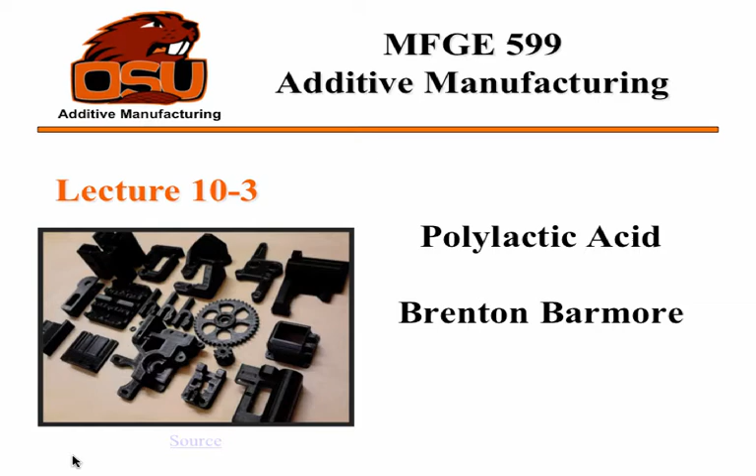My name's Brenton Barmore. I did polylactic acid and accidentally managed to focus only on FDM and then sort of realized there's pretty much nothing else done with polylactic acid, at least that I could find. Well, and that is actually due to its very beneficial properties in FDM.

It has an extremely low thermal expansion coefficient and it has a really, really low melt viscosity, so it's actually the best polymer to be using in an FDM printer. It's so easy to use compared to the others. It's also biocompatible. It's bioabsorbable, just like PMMA, and it's biodegradable, so it's used in a lot of green items. And it's actually food safe, so it's a very useful polymer.

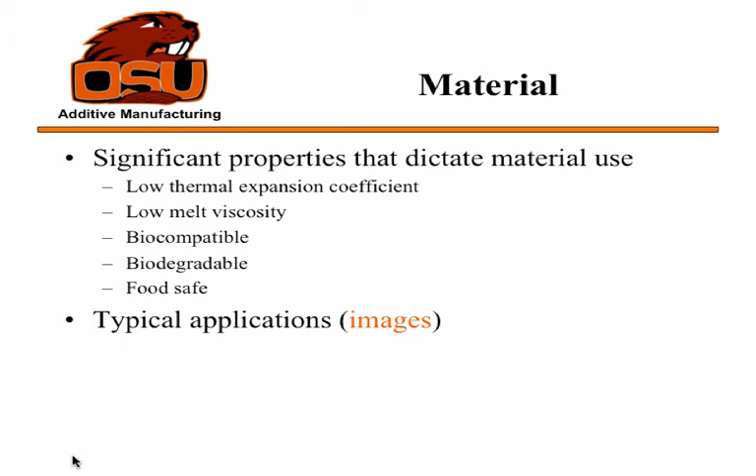Man, this is missing a lot of my stuff, actually. So I had 3 images here. You mind if I just go download the new... Actually, I should have put Michael on there. You can see that.

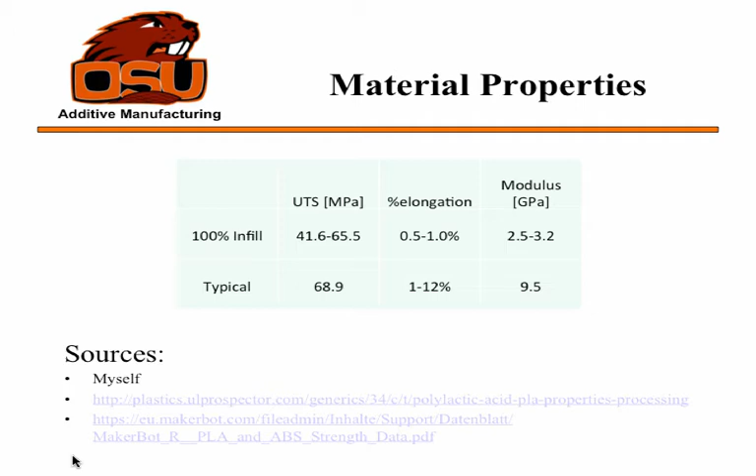And it's because the layers are not actually oriented in the direction of the way you're pulling it, so you just get a shearing effect that breaks everything apart. And shear strength is always much lower; it's usually around half of what tensile strength is.

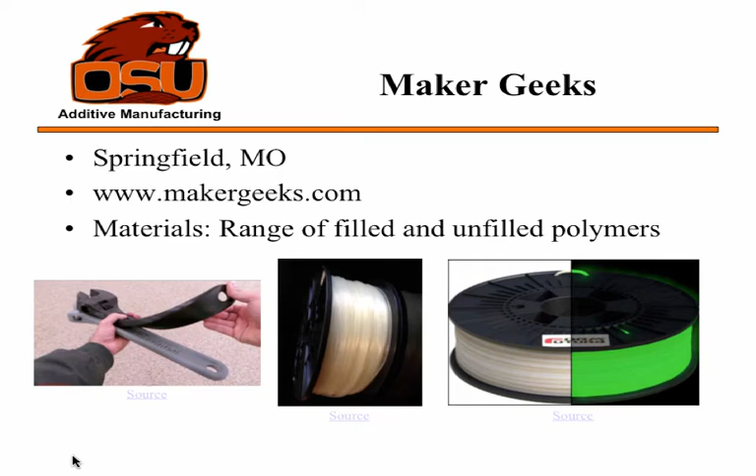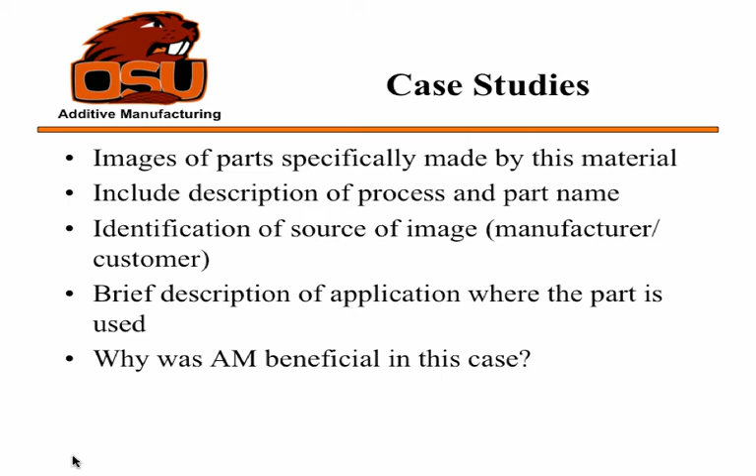I had a case study. It was a biocompatible bone, actually, for a knee. Never been tried yet, because they're not sure how PLA will react in the body, but it shows the perfect modulus, which is actually a really important issue with bone. If you don't match the modulus, you'll actually cause whatever it is to delaminate from it, and you'll have it break apart inside of a human, which is no good. So PLA, about 60% porosity, so high porosity to reach the same modulus as soft bone so that you can replace the actual joint.

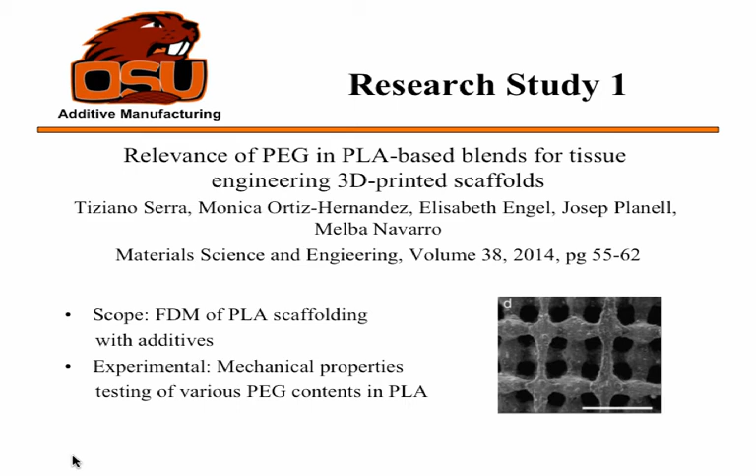My first research study is the relevance of PEG in PLA-based blends for building 3D scaffolds, with a focus on building scaffolding for a medical reason again. They were actually only focused on the mechanical properties for this because they still have yet to get the go-ahead to put anything in a human, like I was just saying. And here are some of the results.

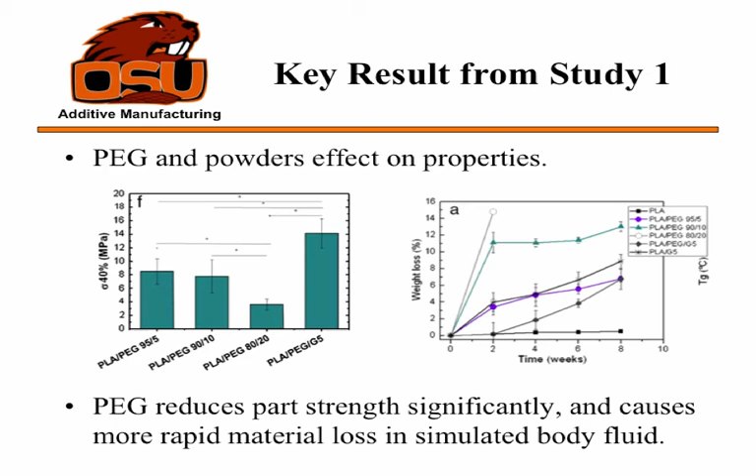And on the right there is a graph of time versus weight loss in a simulated body fluid. And you can actually see adding PEG increases the speed at which weight loss occurs, because PEG is actually water soluble and will disappear very quickly. And if it's just the PLA with a little bit of additive, almost nothing happens over the course of 8 weeks. So they could get an idea of what you would need to make it biocompatible and how you could adjust its properties to fit the application that you're using it for.

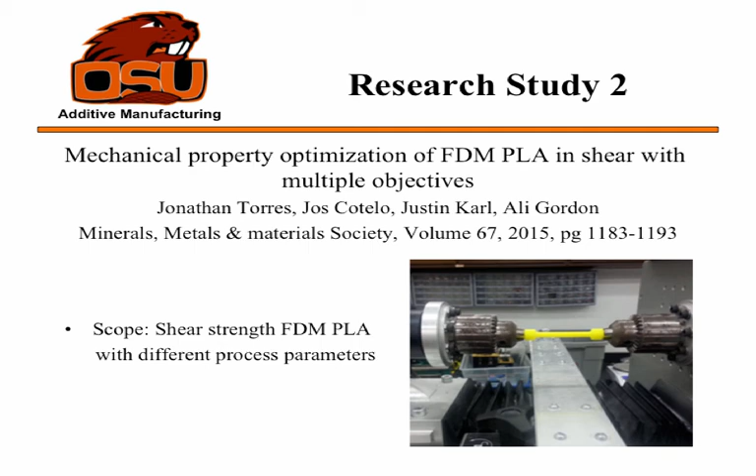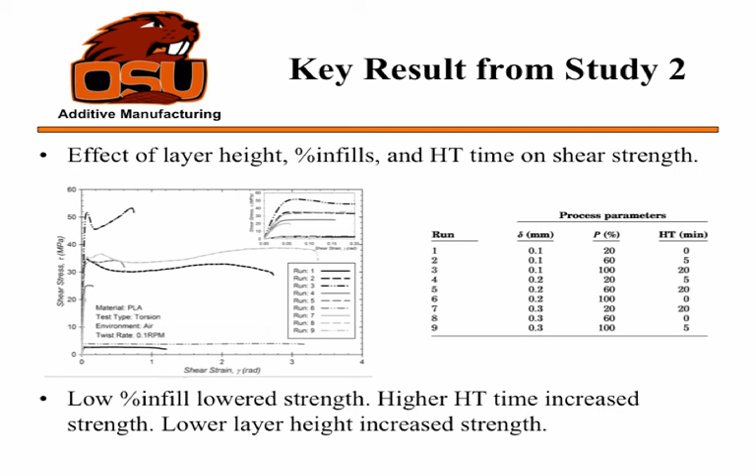And then you can see down on the bottom there is run 1, which interestingly enough has the lowest layer height and lowest infill, but wasn't heat treated, and is actually weaker than most of the other ones. They did a Taguchi analysis, but I'm not too familiar with it, so I didn't include it. And those are my 2 references.